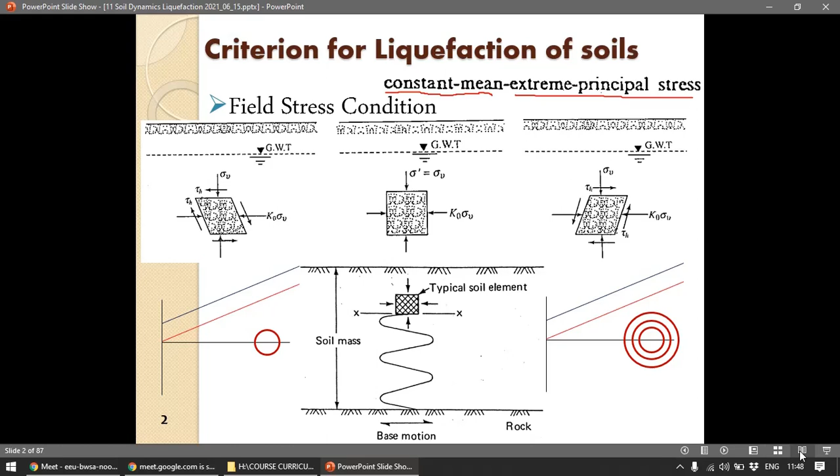So we are discussing liquefaction of soil. In the last class we discussed the constant mean and extreme principal stress concept and how it applies to liquefaction of soil, especially to the cyclic triaxial test we do to determine how liquefaction in a soil may occur.

So typically there is a soil element, and when it is at a particular depth, say z, we have the sigma z in the vertical direction and the sigma h in the horizontal direction.

Try to come on time because it disturbs the flow. Anyway, okay.

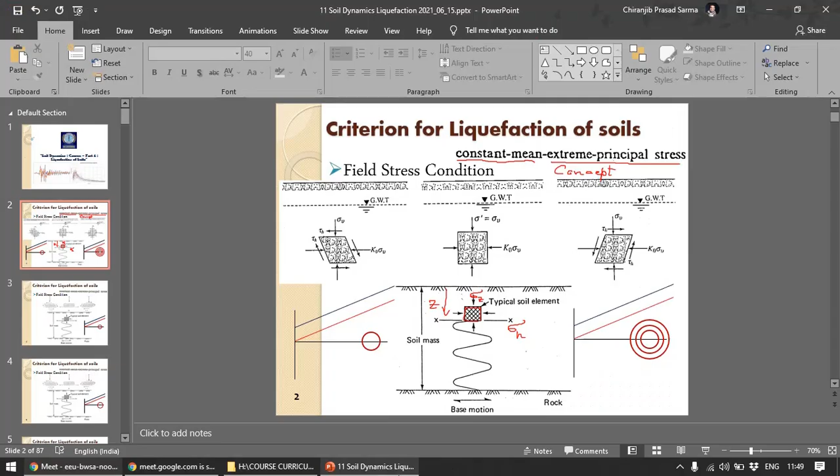So we were discussing liquefaction of soils and the constant mean extreme principal stress concept, and how it applies to the study of liquefaction, and how we apply that concept to the cyclic triaxial test that we do to study the liquefaction phenomena, to understand how the soil will liquefy under various loading conditions.

So we have a soil element at depth z, and we have sigma z and sigma h. This is the initial condition of the soil. So we have sigma h and sigma z, and we have a mean.

So when there is a dynamic load, when there is an earthquake taking place, what happens is the shear waves travel in the upward direction. That is what Seed and Lee, 1966, advocated.

When the shear waves move in the upward direction, the only stress condition that changes in this element is the shear stresses. Once the shear stress acts in this direction, it comes back, reverts to the initial condition, then again changes direction in the other direction, and again reverts back to this initial condition, again changing to the other direction.

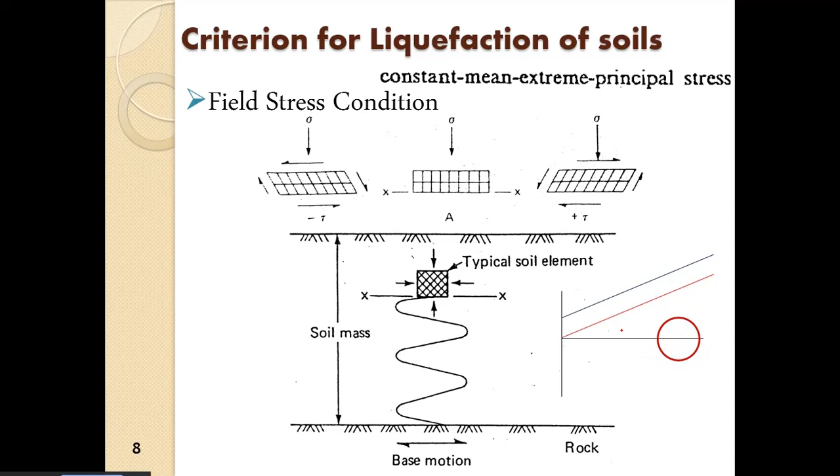Now, while applying this type of loading in the sample, how is this state, this increase and decrease of the Mohr circle while keeping the mean constant, being replicated in the triaxial test? So we have the sigma d here.

So what happens is that while we apply sigma d, here what we have is the initial confining pressure of 200 kPa. That means the cell pressure is at 200 kPa and the initial pore water pressure is 100 kPa. So the effective stress state in the soil is 100 kPa.

So we have the effective stress and we have the total stress.

Now when we start applying, so this is 200 kPa and this is 100 kPa. So when we start applying the deviator load, it starts from 0, so the diameter of the Mohr circle here is 0. As we increment the deviatoric stress from 0 to 1 to 2 to 3, as it goes on increasing, the Mohr circle will develop.

So this is the total stress Mohr circle, and this point will remain constant at 200 kPa. So the Mohr circle will develop up to sigma d. So sigma 1 is equal to sigma c, cell pressure, plus sigma d. This is the maximum deviatoric load that we have applied.

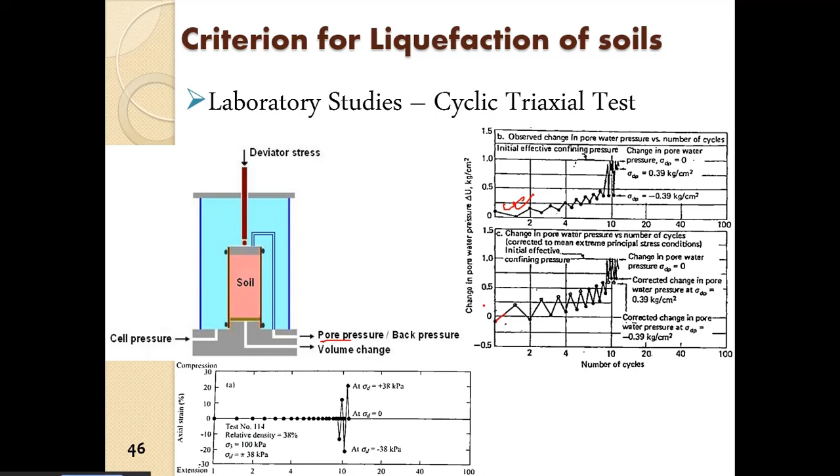So this is the laboratory study done by Seed and Lee 1966, and that particular increment. Here we see there is an increment of sigma d by 2, so that is the excess pore water pressure initially developed. The researchers corrected it from the pore pressure measurement. So this is the measured pore pressure using the instruments, and then that measured pore pressure was corrected for this particular value. We see that only after a number of cycles there is significant amount of strain, axial strain, in the sample. That is because...

As the pore pressure develops, we have the loading like this, and this loading goes on. So as the pore pressure develops, the Mohr circle starts moving, and now it has reached a failure condition here, a failure surface, so there is huge amount of significant displacement. And then at a particular point, all effective stresses are nullified, so we have a liquefied soil. The soil will now behave as a viscous fluid, and it will almost flow at constant shear stress. So we have to apply a constant shear stress at that state to make it flow. That is flow liquefaction.

Now if we plot this condition in terms of P and Q, we define P as sigma 1 plus sigma 3 by 2, and Q as sigma 1 minus sigma 3 by 2. So this is basically the diameter here, the radius here is Q, and this point P is the center of the Mohr circle, and the radius is Q. But here it is tau and sigma.

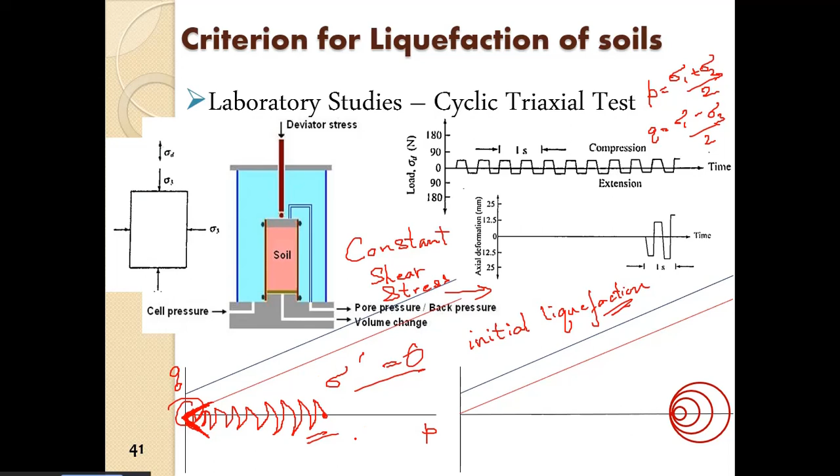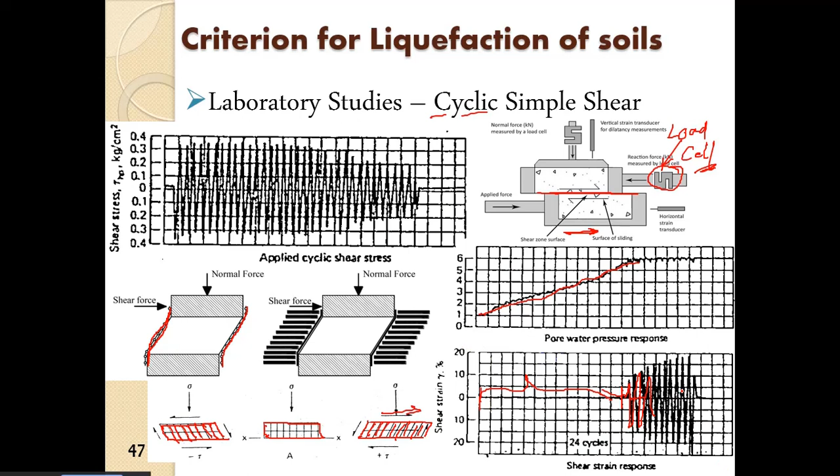So that means the pore pressure has to develop, and it has to lead to the failure, as we define the failure surface. So the pore pressure develops, the Mohr circle will move to the left, and as soon as it touches the failure line, failure surface, there is significant straining in the sample, and with that there is also development of pore water pressure.

As we saw, Casagrande in 1936 defined using the critical void ratio that if a soil is in a loose state, in undrained condition it will develop excess pore water pressure, and positive excess pore water pressure will be developed. So there will be a decrease in the effective confinement, and that soil is susceptible to liquefaction.

So if it is in a loose state, it has an undrained stress path in this direction, and as soon as it reaches here, we have liquefaction. That is what was defined by Casagrande in 1936.

Then we saw that this is not always applicable. This sample A liquefied and sample B did not liquefy, though it is above the critical void ratio line. As far as this definition, this should liquefy because this is the stress path, but it did not liquefy, whereas this liquefied. So we will see how that is defined.

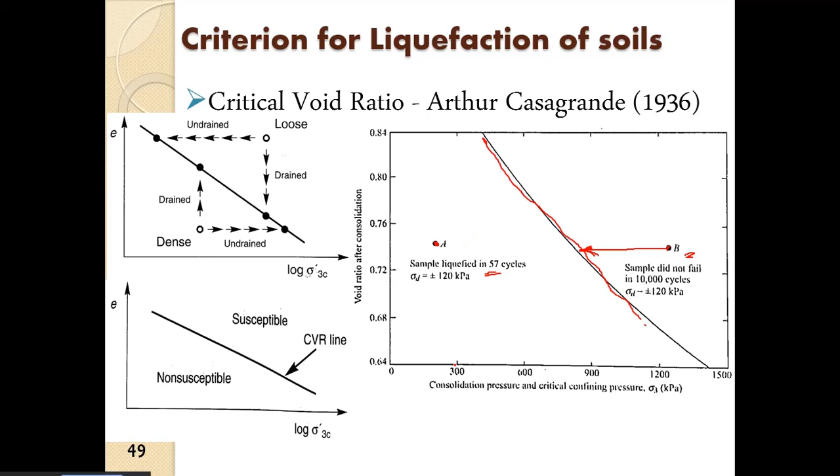Going further, we have to look into two aspects: what is strain controlled test and what is stress control test. Basically in strain control test, what we do is there is a proving ring.

This entire sample is moved in the upward direction, and the reactive load from the sample is measured in this proving ring. The sample is shearing at a steady rate, a constant rate, and we have the reaction from the sample measured here. Similarly, in the direct shear sample, the lower part is moved or displaced towards the right, and we have a load cell placed here that measures the reaction from the sample.

In the type of curves we get, as the sample is moved, it reaches a maximum value, and suddenly there is failure in the sample. What happens is this spring now pushes into the sample and the load in the spring is released, so we have a release in the load. This is called strain softening behavior.

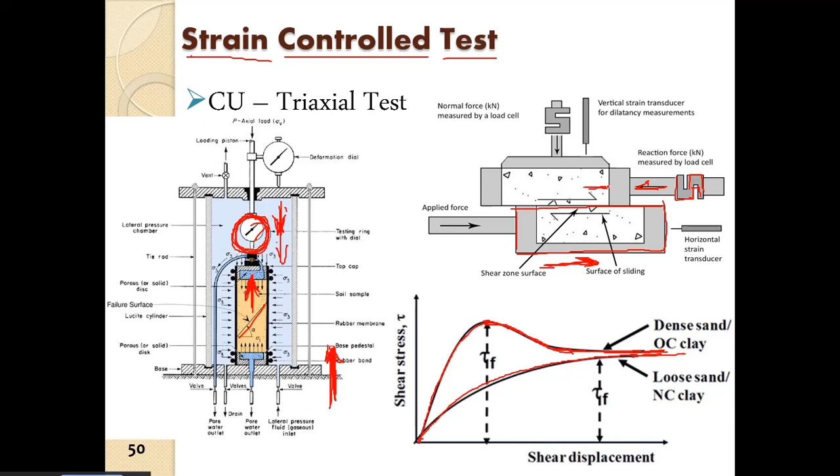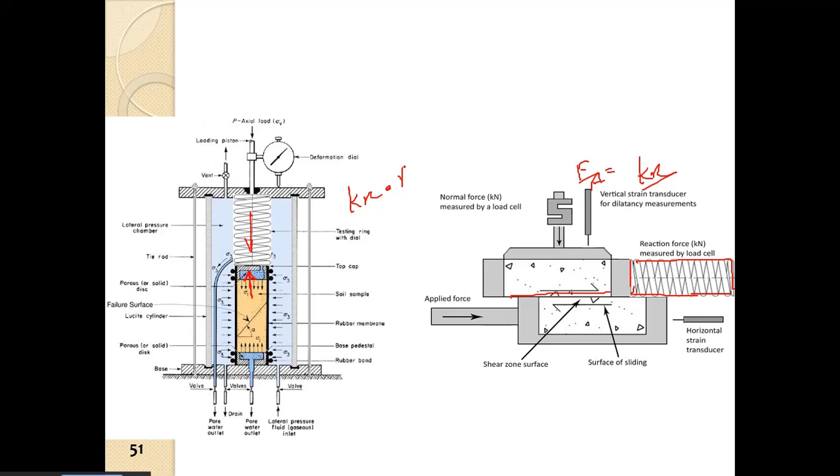So it is basically like a spring attached to the sample, and we measure compression in the spring. From the compression in the spring, we measure the force, and from the force we divide by the area and we get the tangential stress in the sample. Similarly, the sample exerts a load onto the spring and the spring compresses; from that compression we get the force, and divided by the cross-sectional area of the sample, we get the axial stress, sigma A or sigma D, in the sample.

Initially the sample moves up, and as it moves up this spring compresses, then suddenly the soil is unable to take the load anymore, and the spring now compresses into the soil and the soil fails. As soon as the soil fails, we have a strain softening part. Then when the soil is moving up at a constant rate, we have a steady compression measured in the spring, which is the deviatoric stress.

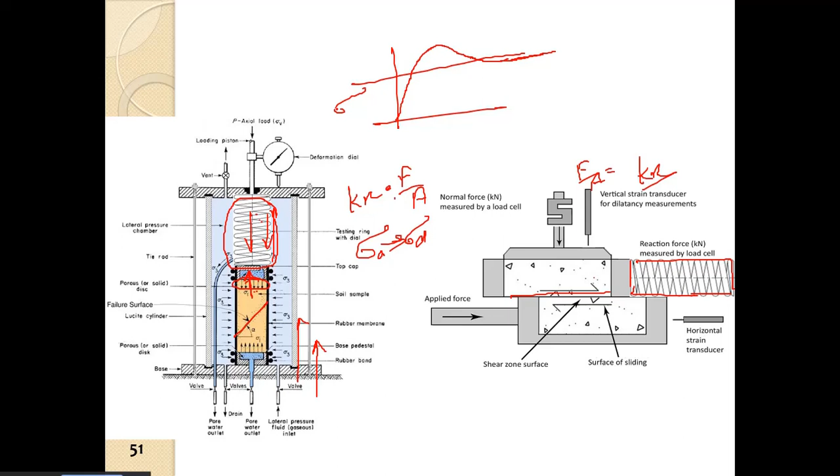Whereas in the stress control test, what we do is we apply the load according to our requirement. It is not based on the reaction from the soil. We apply whatever load we want to apply, and we measure the strain in the soil.

All right, we measure the strain in the soil now. So here you see there was no strain here, no strain there, still we were applying the same amount of load. But what happened? When there was a significant amount of pore pressure developed, suddenly for that same amount of deviatoric load, there is significant amount of displacement or axial deformation. So that is most of the cyclic triaxial tests.

They are stress control tests. Of course, there are strain control tests as well, that I leave up to you for further research and study. So this is, of course, just an introduction to liquefaction, and we will continue with this.

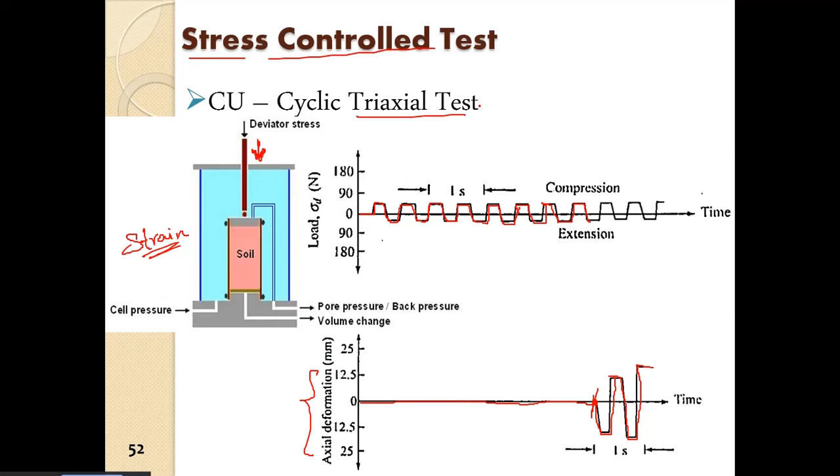So then we came to why we need to define the steady state line. We learned that Castro 1969 defined that when a soil is loaded, up to a point it will get loaded, but beyond that point, what happens? This is of course for a stress control test. So suddenly there is a huge amount of strain, right?

So if we plot the strain up to this point, there is no strain at all, maybe some amount of strain will be there, and then suddenly there is a significant amount of strain being developed in the soil. So in this manner also we can say there is a huge amount of axial deformation.

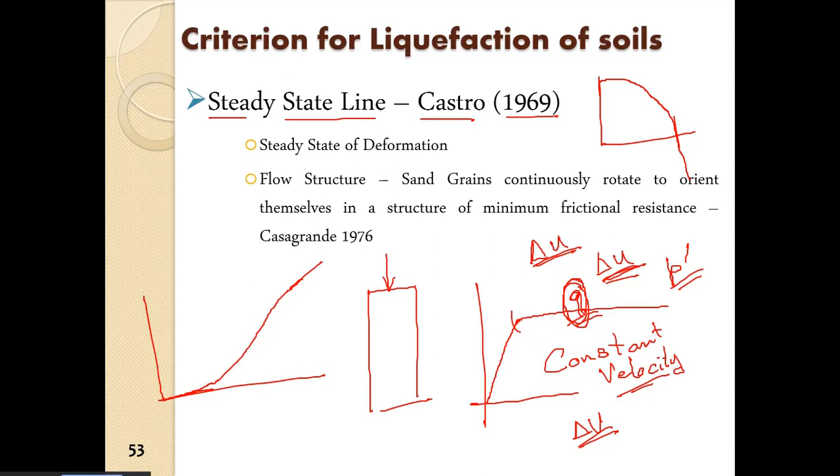So when that happens, there is excessive amount of pore pressure generation. And then after a certain point, the generation in the pore pressure stabilizes, and the deviatoric stress required to cause a constant rate of deformation also arrives at a constant value for a particular confining stress, effective confinement, and then the soil shears at a constant velocity and constant volume - no volume change, no pore pressure generation. That particular state was defined as the steady state of deformation by Castro 1969.

So to arrive at that, what he did was test three samples. Here P is equal to sigma 1 plus sigma 3 by 2, so P dash is equal to P minus U. And Q is equal to sigma 1 minus sigma 3 by 2.

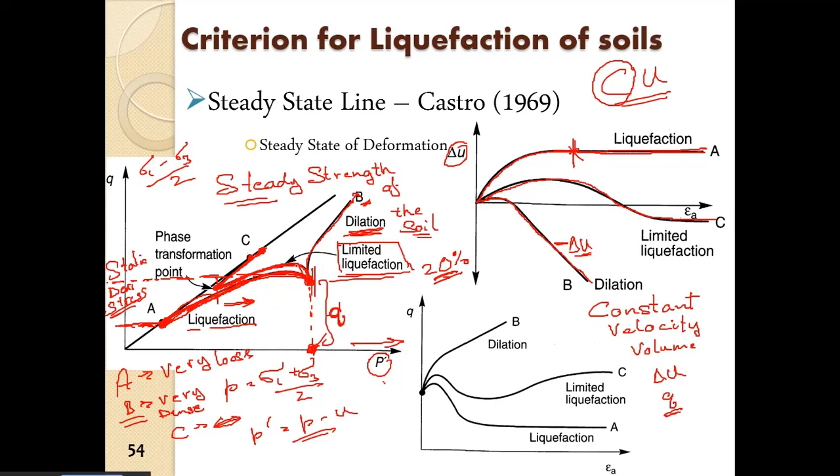He suggested that if a soil is above this line, it is susceptible to flow type liquefaction, and if below this line, it is not susceptible to flow liquefaction. But that does not mean it's not prone to cyclic mobility, which is a totally different phenomenon. As we've seen, this limited liquefaction case, a soil below the steady state line may undergo deformation or develop pore water pressure, and may have significant deformation through cyclic mobility.

We will see what cyclic mobility is. So this is a flow type of liquefaction if it is above this steady state line.

So what Castro did was explain the condition of flow liquefaction. He did a series of stress controlled tests. Here one example is given: a sample of loose and saturated sand was taken, and it was isotropically consolidated.

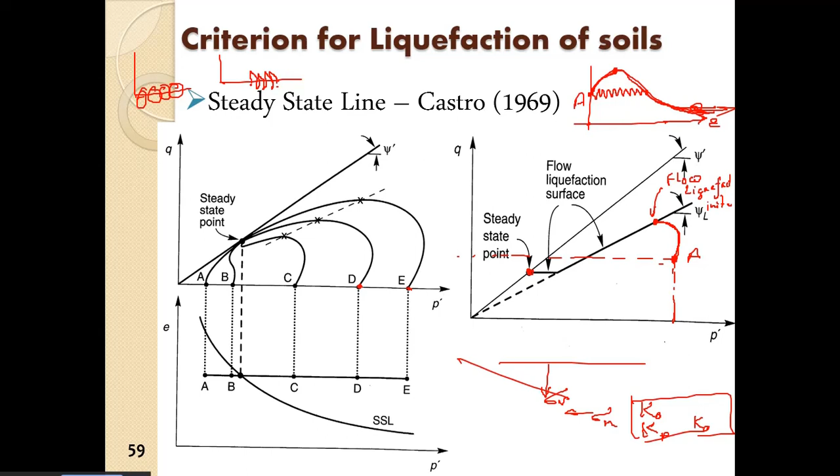Now similarly, without applying so much stress, if we apply a dynamic load, we can reach the same state and liquefaction will be initiated. As we saw in the previous slide, the Mohr circles move to the left, and if I draw the PQ stress path, it will look like this and oscillate along the failure line. So we can apply a dynamic load, and there will be pore pressure generation. For the first few cycles, it will oscillate here itself with no pore pressure generation. As soon as pore pressure generation starts, it will move and reach here.

So as soon as it reaches here, we have flow liquefaction. Here we have static flow liquefaction, and here we have flow liquefaction due to dynamic loading. So this is due to monotonic loading, so we have the liquefaction here.

So that is the significance of the flow liquefaction surface. If we have a point here, we can initiate liquefaction.

This point here suggests two conditions: the effective confinement and the deviatoric stress in that sample. So if suppose we have sigma v and sigma h for an element, p dash is equal to sigma v dash plus sigma h dash by 2, and q is equal to sigma v dash minus sigma h dash by 2.

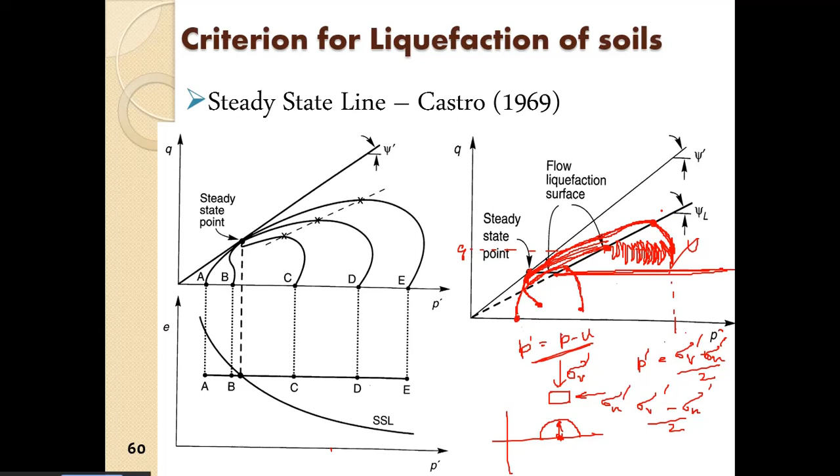So flow liquefaction only occurs if the stress state point and the corresponding void ratio are above this region, here. This is the region. If the stress state is here in this region, we have the flow liquefaction, the zone of susceptible flow liquefaction.

Now obviously the loading has to be undrained. That is an important case. The loading has to be undrained.

Now similarly, if the point is here, there may be three cases. One case is when there is an oscillation here, so there is no stress reversal in the sample, and what will happen is that the state will reach this point and it will oscillate here, keeping on oscillating in this range.

So basically what will happen is that the effective stress condition will stabilize at this point, and the initiation of liquefaction cannot occur. Of course some amount of displacement will occur, but cyclic mobility as such will also not occur because effective stresses are still there.

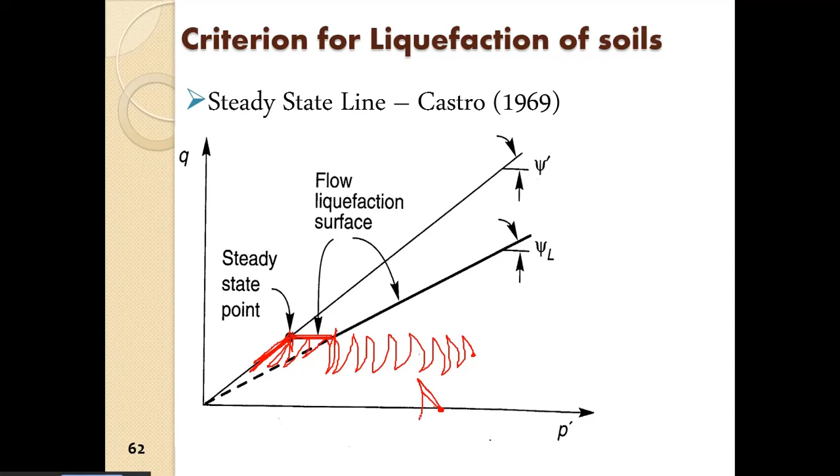Now in the third case, what we discuss is in the triaxial test, when the stress state is reversing, it is going up and reversing, going up and reversing. So the shear in the sample is changing direction. Once it is in this direction, in the other part of the cycle it is in the other direction. So the sample is shearing one way in this half cycle, and the other way in the other part of the cycle. That is what we discussed in the triaxial cell, as well as the simple shear.

So in that case, the stress path will move in this manner, and then it will oscillate here on the failure surface. It will keep on oscillating. So if you see at this state, when it is coming and reaching this state, again going and coming and reaching this state again, this is a point where effective stress P dash is equal to 0.

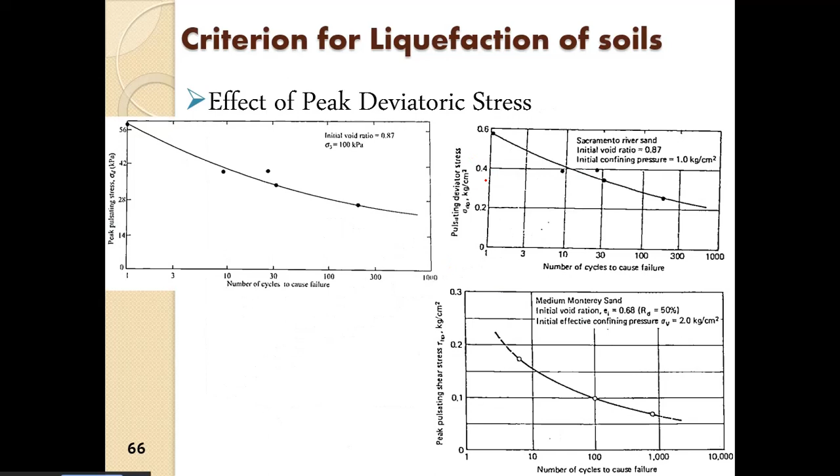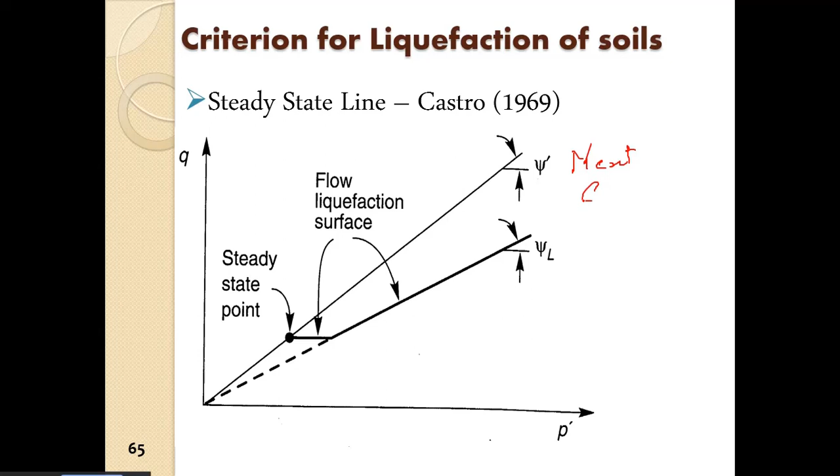So these are some important points to keep in mind, and in the next class we will discuss the important points, and of course how to evaluate whether there are chances of liquefaction or not. So in the next class we are going to discuss that.